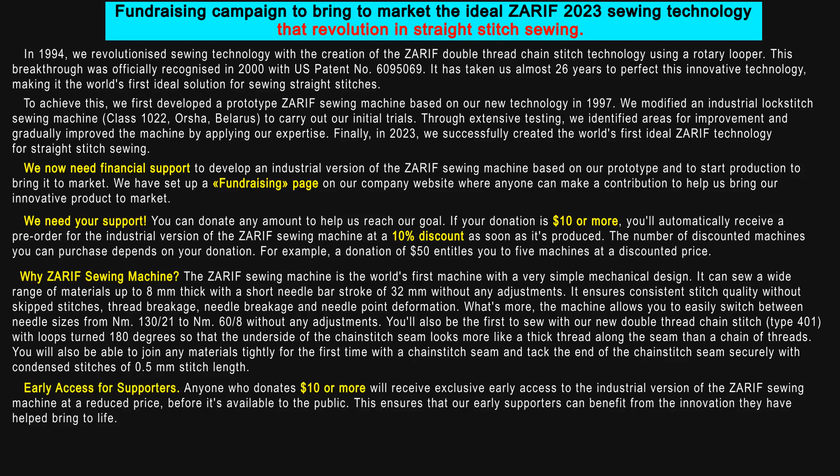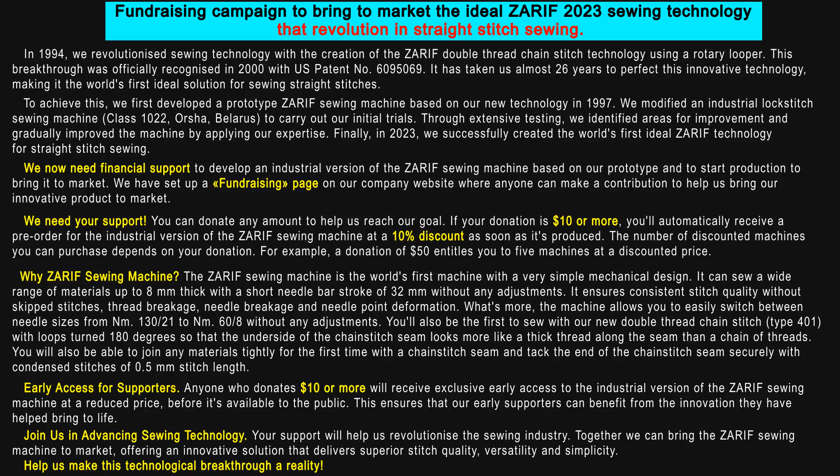Our Ideal Zarif 2023 year double thread chain stitch technology has revolutionized sewing machine design and straight stitch sewing.

Eternal disadvantages of existing technologies for forming lockstitch type 301 and double thread chain stitch type 401. The eternal disadvantages of the technologies of the lockstitch and of the double thread chain stitch when using a looper that carries the bottom thread. The eternal disadvantages of lockstitch technologies that are linked to the use of the hook.

Attention, no matter how much lockstitch technology is developed in the future, it will be technically impossible to obtain a lockstitch by feeding the bottom thread into the hook from a large bobbin instead of a small bobbin, to exclude frequent changing of the bobbin with the bottom thread located inside the hook, nor will it be technically possible to obtain quality sewing of various materials with different thickness, density and stiffness without adjusting the normal tension of the top and bottom threads.

Only our revolutionary Ideal Zarif double thread chain stitch technology of 2023, using a rotary looper with a small needle bar stroke of 32 mm, is capable of sewing quality straight thread seams on various materials up to 8 mm thick with different thickness, density and stiffness without adjusting the normal tension of the top and bottom threads, which we have spent approximately 26 years developing.

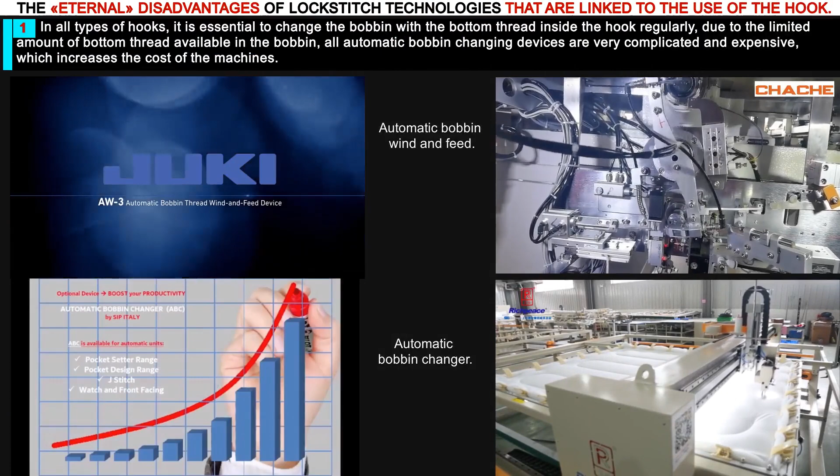Technologies of the lockstitch type 301 with different types of hooks. In all types of hooks, it is essential to change the bobbin with the bottom thread inside the hook regularly. Due to the limited amount of bottom thread available in the bobbin, all automatic bobbin changing devices are very complicated and expensive, which increases the cost of the machines.

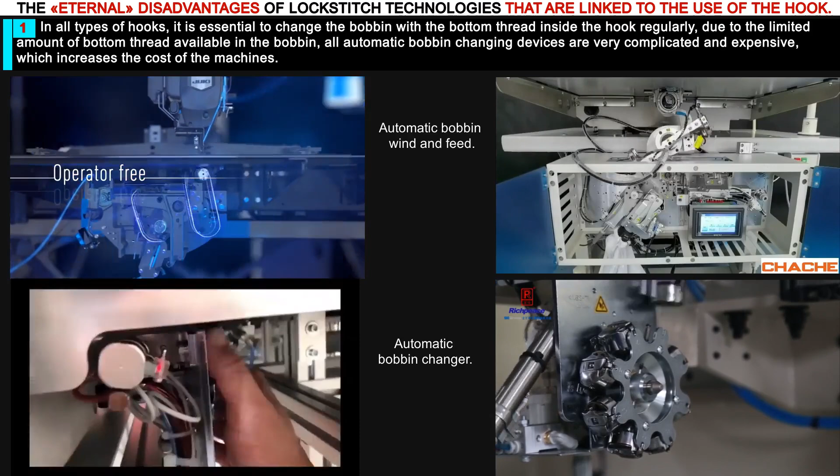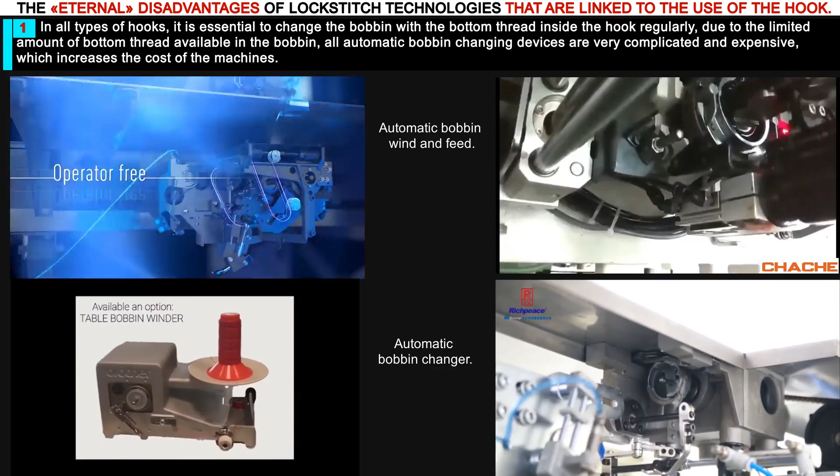When using all types of hooks, it is necessary to adjust the thread's tension to ensure the interweaving of threads in the middle of the sewn materials, when changing the thickness, density, stiffness and elasticity of the sewn materials, as well as when changing the thickness and type of sewing threads, and to increase the density of the join of materials, the smoothness of the seam on light materials, and the elasticity of the seam on elastic materials.

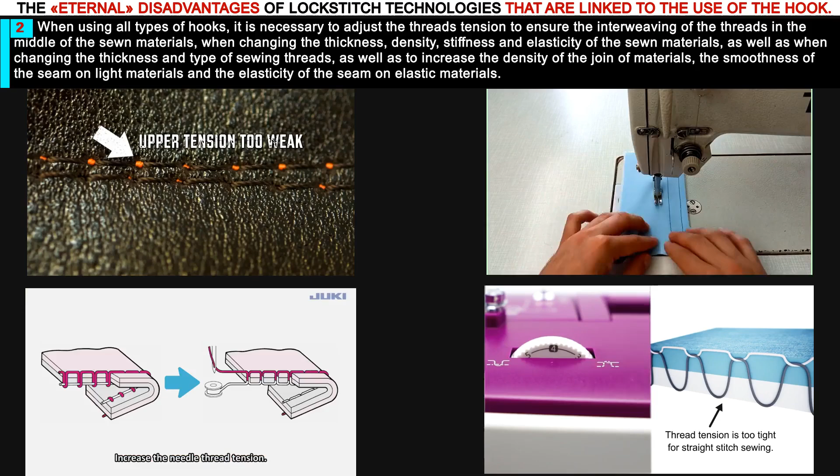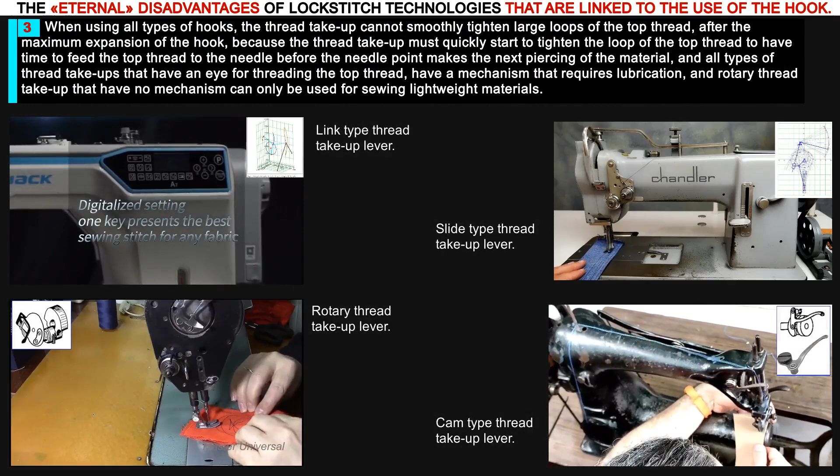When using all types of hooks, the thread take-up cannot smoothly tighten large loops of the top thread after the maximum expansion of the hook, because the thread take-up must quickly start to tighten the loop of the top thread to have time to feed it to the needle before the needle point makes the next piercing of the material. All types of thread take-ups with an eye for threading the top thread have a mechanism that requires lubrication, and rotary thread take-ups without such a mechanism can only be used for sewing lightweight materials.

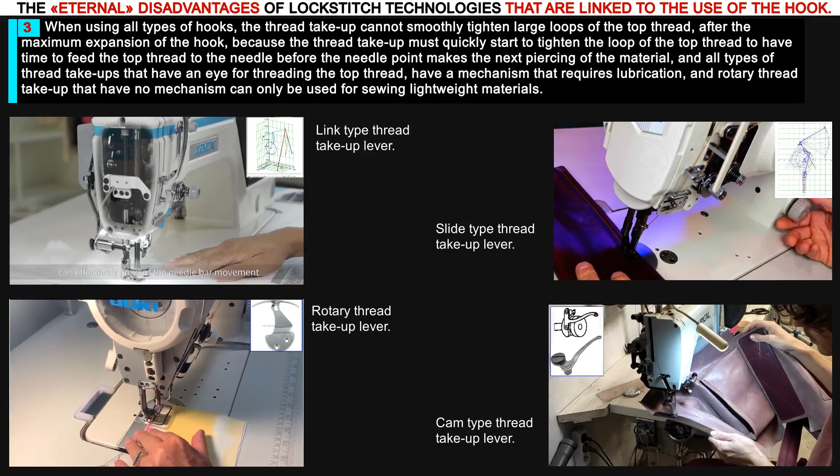All types of hooks have complex designs and are made up of many parts.

All types of hooks have a sliding area, as they have both fixed and moving parts, and their sliding areas must be lubricated, which can be done manually or automatically. The automatic lubrication system for the sliding area complicates the design of the hooks, making them more complex.

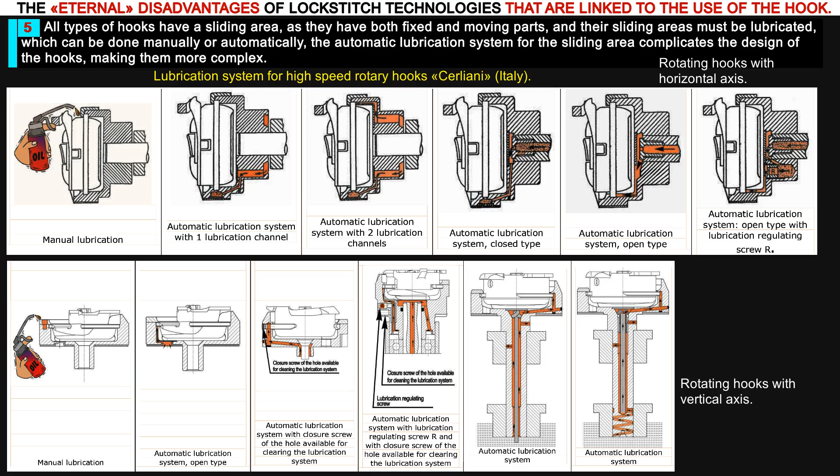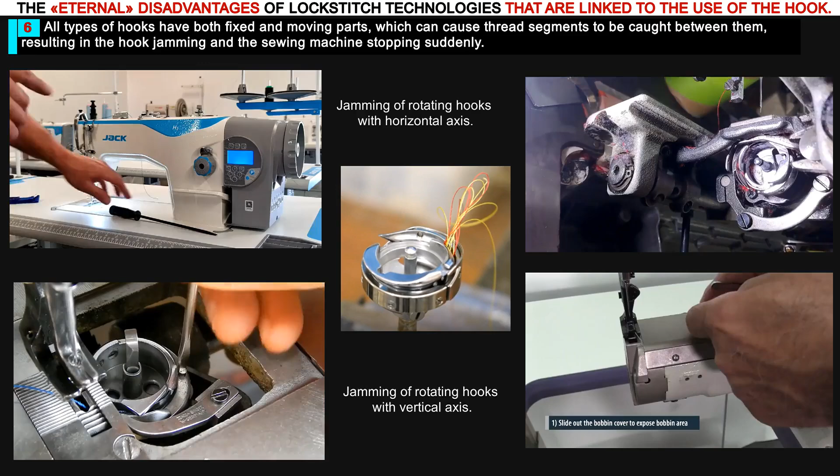All types of hooks have both fixed and moving parts, which can cause thread segments to be caught between them, resulting in the hook jamming and the sewing machine stopping suddenly.

All types of hooks have a limited life due to friction in the sliding area between the fixed and moving parts of the hook.

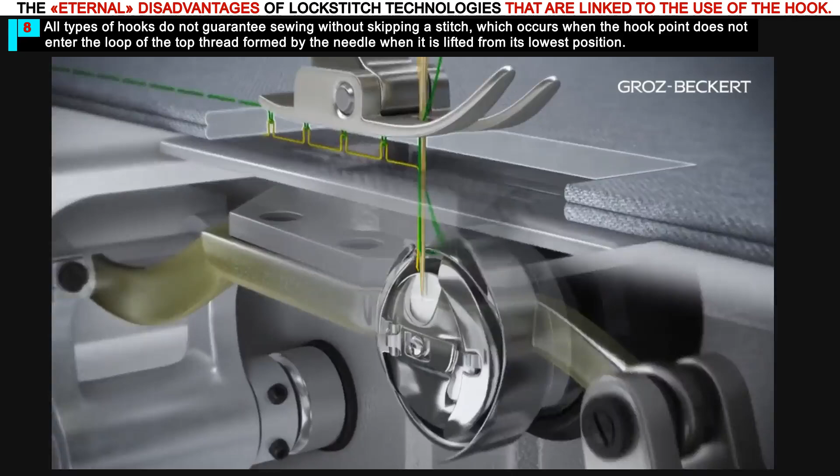All types of hooks do not guarantee sewing without skipping a stitch, which occurs when the hook point does not enter the loop of the top thread formed by the needle when it is lifted from its lowest position.

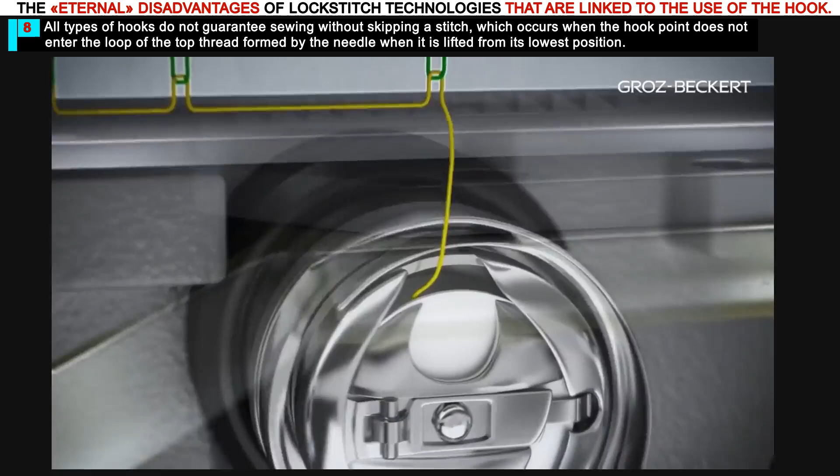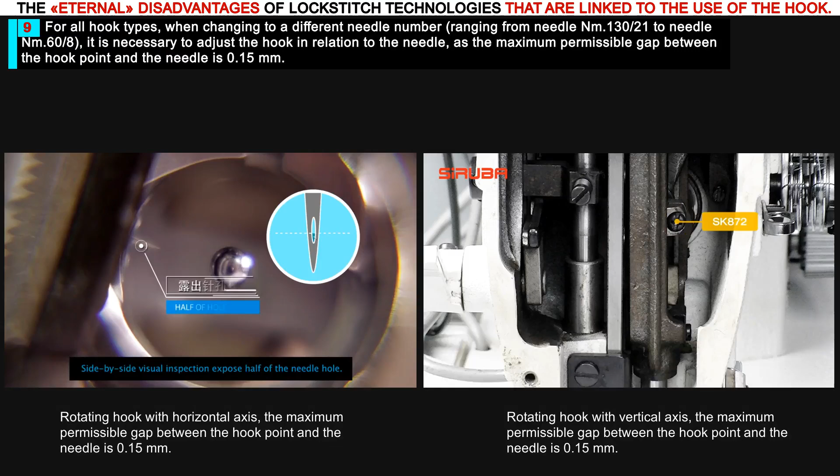For all hook types, when changing to a different needle number, ranging from needle number 130 to needle number 60, it is necessary to adjust the hook in relation to the needle, as the maximum permissible gap between the hook point and the needle is 0.15 mm.

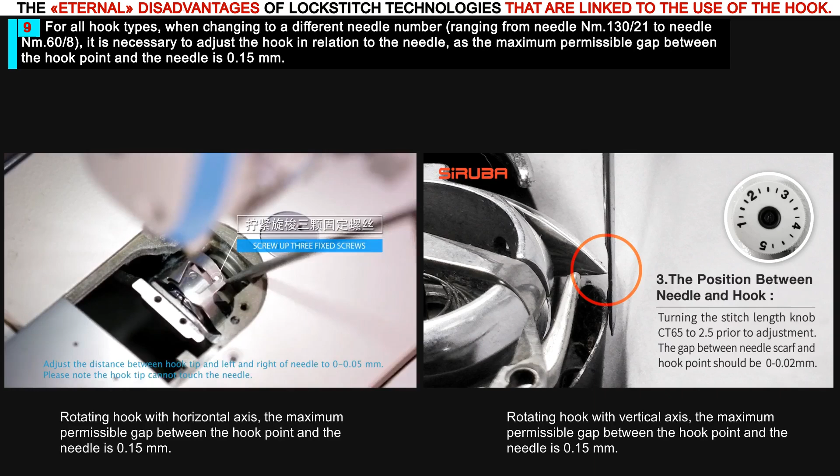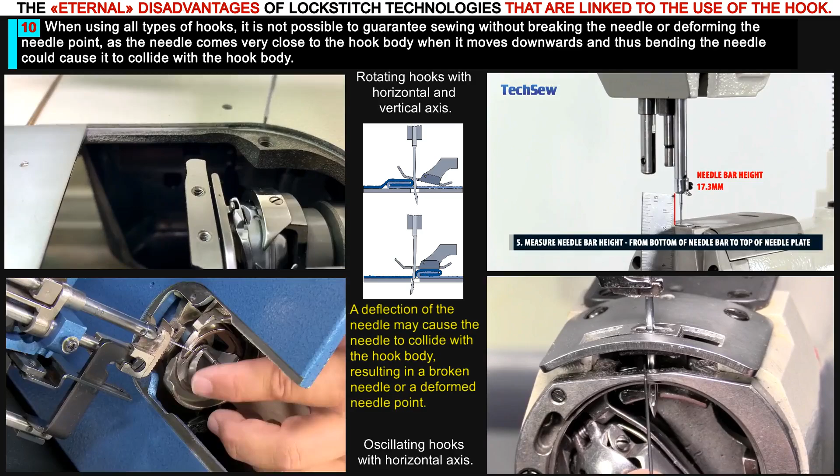When using all types of hooks, it is not possible to guarantee sewing without breaking the needle or deforming the needle point, as the needle comes very close to the hook body when it moves downwards, and thus bending the needle could cause it to collide with the hook body.

All types of hooks consume a considerable amount of the top thread. As a result, each part of the top thread before entering the stitch repeatedly passes through the material to be sewn, the needle eye and the thread guides. This leads to wear of the top thread and a reduction in its strength. As the size of the hooks and the sewing speed increase, the loss of top thread strength during the sewing process also increases.

For sewing thick and heavy fabrics up to 8 mm in thickness, using all types of hooks, the sewing machine needs a large needle bar stroke, greater than 32 mm.

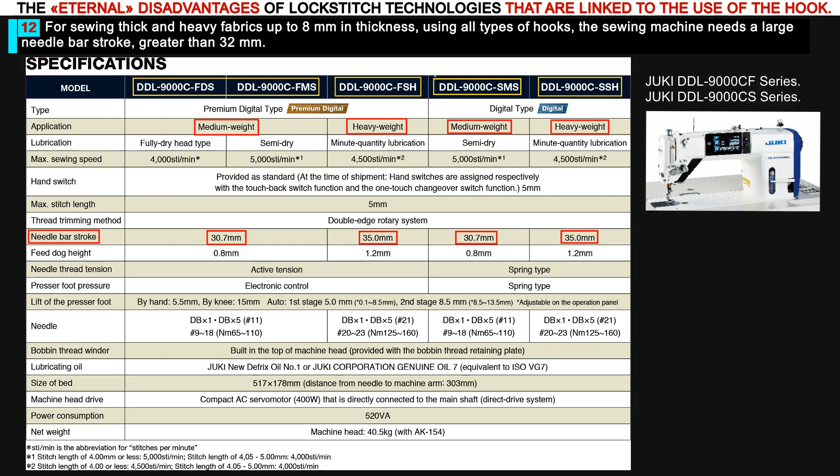The eternal disadvantages of double thread chain stitch technologies that are linked to the use of the looper carrying the bottom thread.

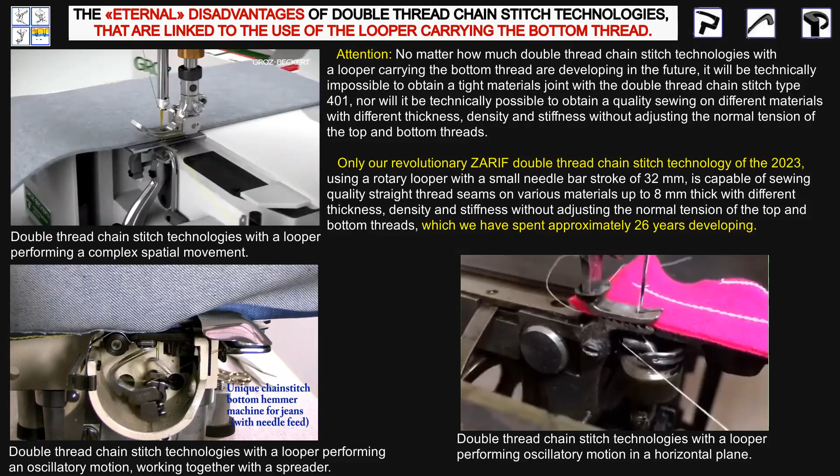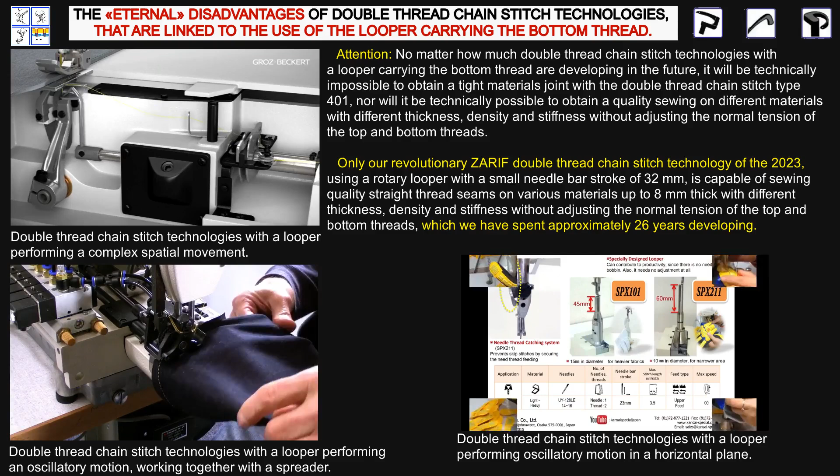Attention: no matter how much double thread chain stitch technologies with a looper carrying the bottom thread develop in the future, it will be technically impossible to obtain a tight materials joint with the double thread chain stitch type 401, nor will it be technically possible to obtain quality sewing on different materials with different thickness, density and stiffness without adjusting the normal tension of the top and bottom threads.

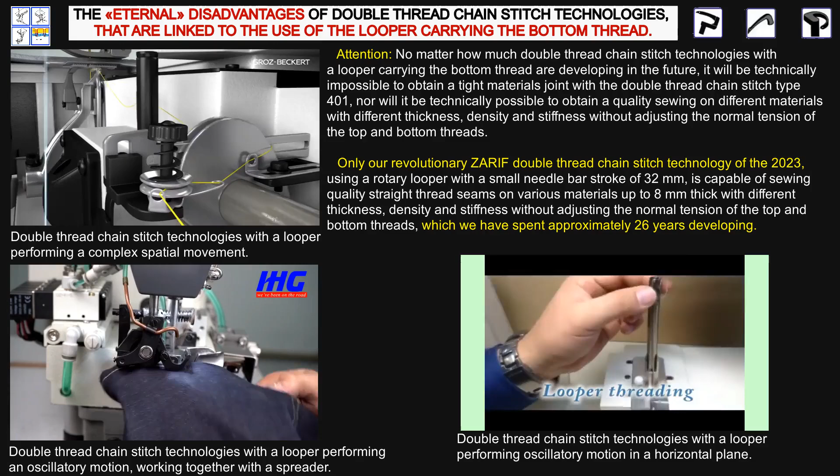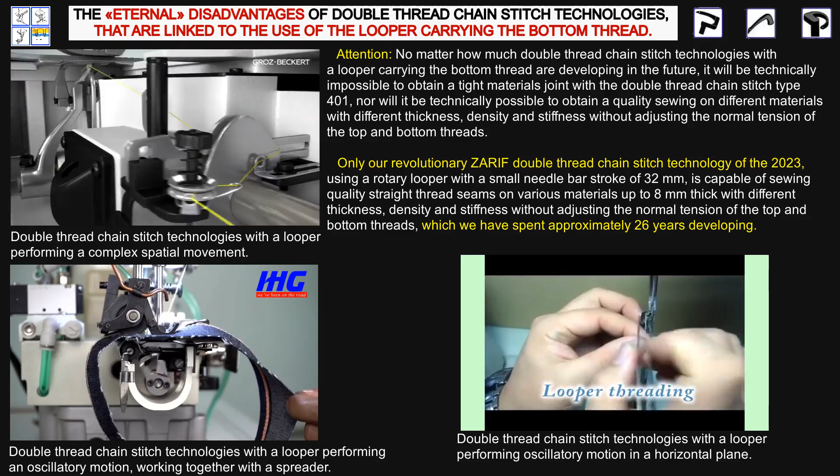Only our revolutionary ideal Zarif double thread chain stitch technology of 2023, using a rotary looper with a small needle bar stroke of 32 mm, is capable of sewing quality straight thread seams on various materials up to 8 mm thick with different thickness, density, and stiffness, without adjusting the normal tension of the top and bottom threads, which we have spent approximately 26 years developing.

Double thread chain stitch technologies using 3 types of loopers carrying the bottom thread.

All 3 technologies using 3 types of loopers carrying the bottom thread are not able to join the materials tightly with a chain seam and reduce the thickness of the underside of the chain seam. This is due to the fact that there is 2-stage tightening of the top thread loop located in the previous stitch.

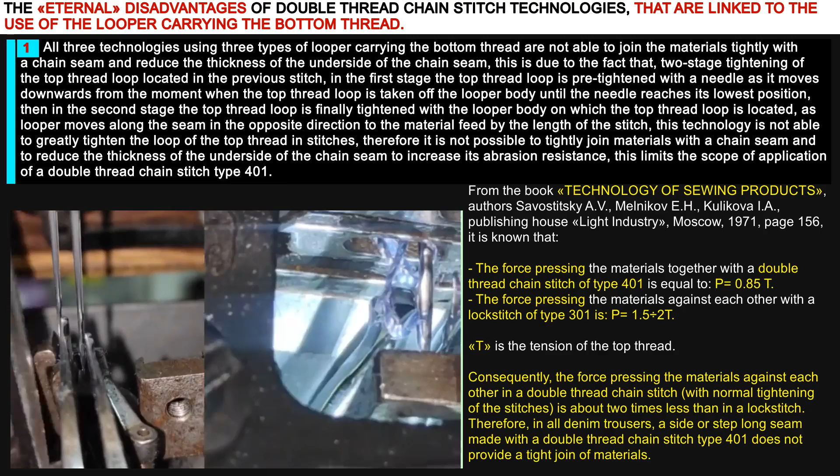In the first stage, the top thread loop is pre-tightened with a needle as it moves downwards from the moment when the top thread loop is taken off the looper body until the needle reaches its lowest position. Then in the second stage, the top thread loop is finally tightened with the looper body on which the top thread loop is located,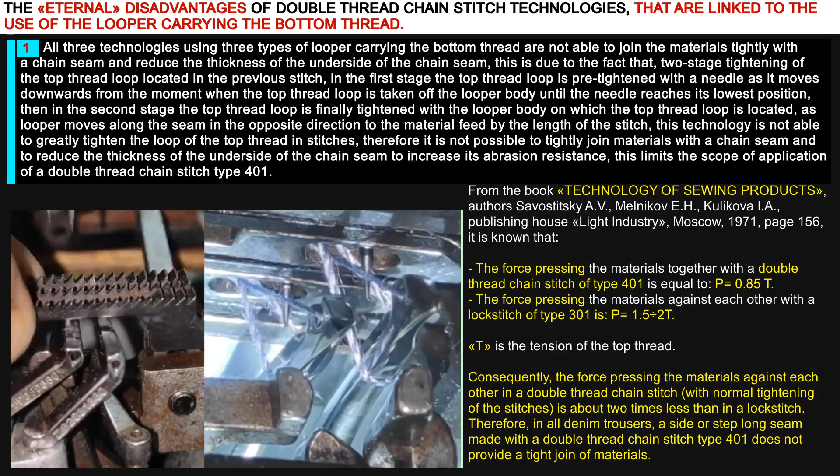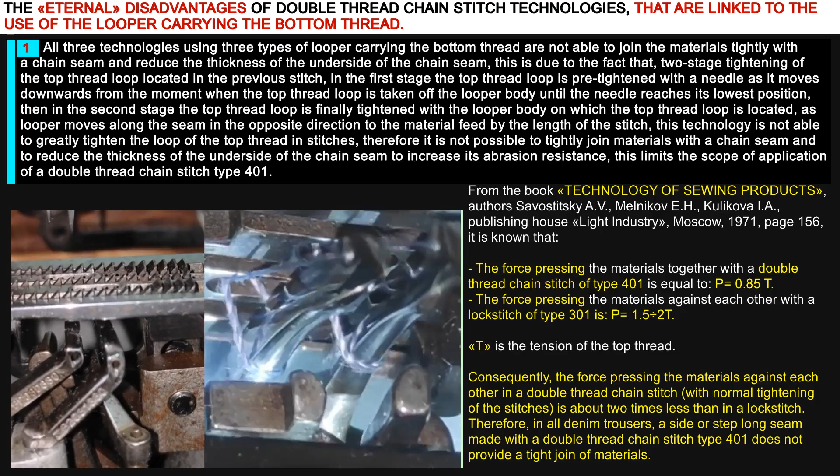as the looper moves along the seam in the opposite direction to the material feed by the length of the stitch. This technology is not able to greatly tighten the loop of the top thread in stitches, therefore it is not possible to tightly join materials with a chain seam and to reduce the thickness of the underside of the chain seam to increase its abrasion resistance. This limits the scope of application of a double thread chain stitch type 401.

All 3 technologies using 3 types of loopers carrying the bottom thread are forced to use a needle with 2 long grooves. This is due to the pre-tightening of the loop of the top thread located in the previous stitch with a needle during its downward movement.

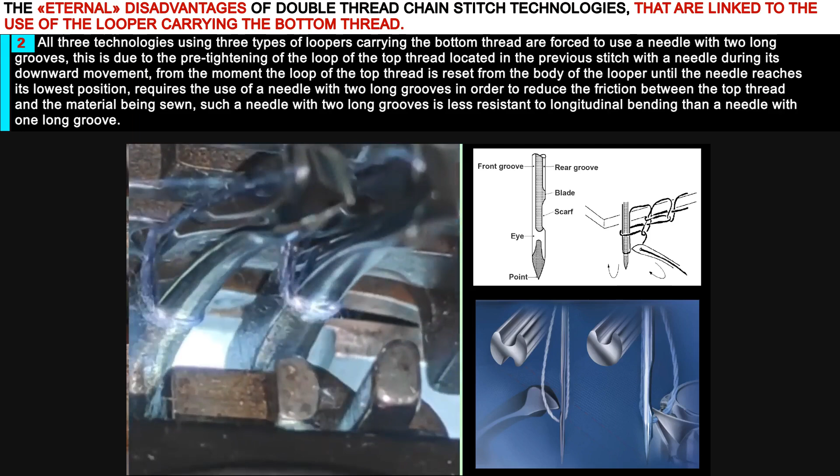From the moment the loop of the top thread is reset from the body of the looper until the needle reaches its lowest position, this requires the use of a needle with 2 long grooves in order to reduce the friction between the top thread and the material being sewn. Such a needle with 2 long grooves is less resistant to longitudinal bending than a needle with 1 long groove.

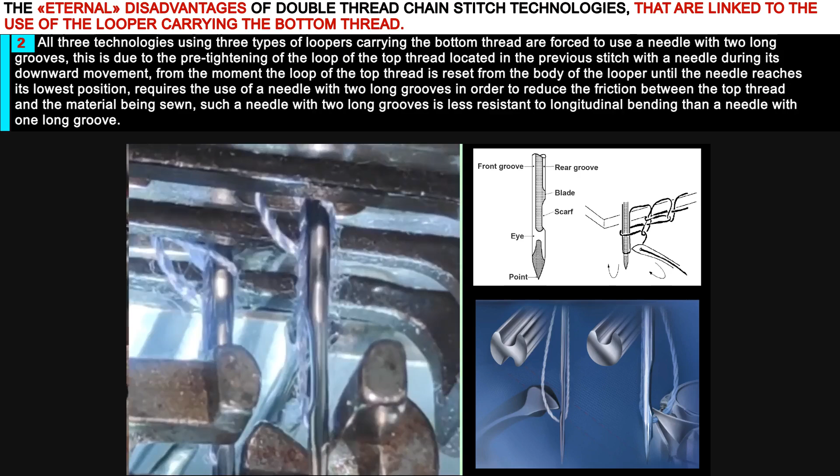All 3 technologies using 3 types of loopers carrying the bottom thread are not able to join combinations of different materials qualitatively. This is due to the fact that the thread take-up feeds the top thread into the needle until the top thread loop is released from the looper body.

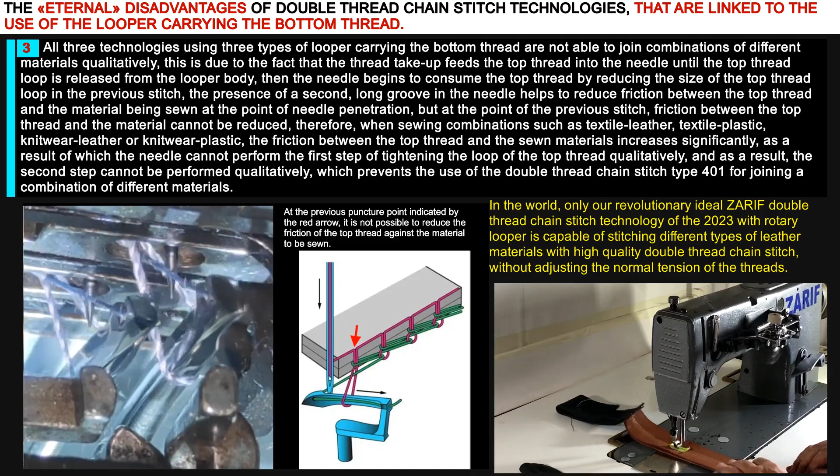Then the needle begins to consume the top thread by reducing the size of the top thread loop in the previous stitch. The presence of a second long groove in the needle helps to reduce friction between the top thread and the material being sewn at the point of needle penetration, but at the point of the previous stitch, friction between the top thread and the material cannot be reduced.

Therefore, when sewing combinations such as textile-leather, textile-plastic, knitwear-leather, or knitwear-plastic, the friction between the top thread and the sewn materials increases significantly. As a result, the needle cannot perform the first step of tightening the loop of the top thread qualitatively, and as a result the second step cannot be performed qualitatively, which prevents the use of the double thread chain stitch type 401 for joining a combination of different materials.

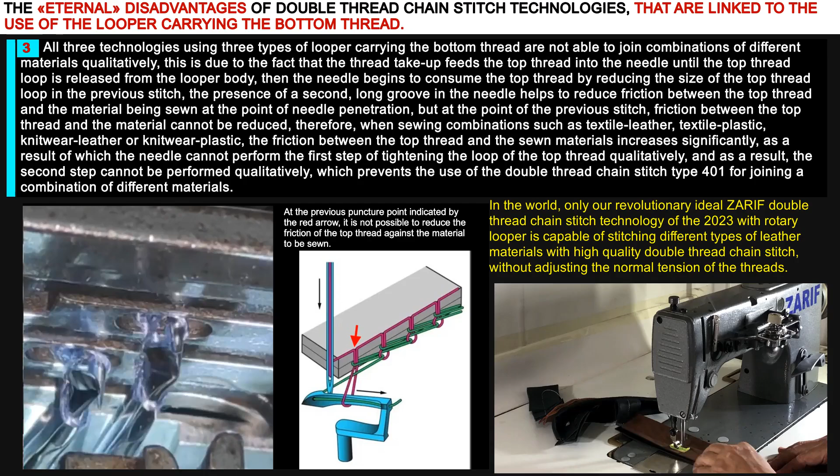All technologies that use loopers carrying the bottom thread are not able to sew double thread chain stitch of high quality on different materials of different thickness, stiffness, and density without adjusting the normal tension of the threads.

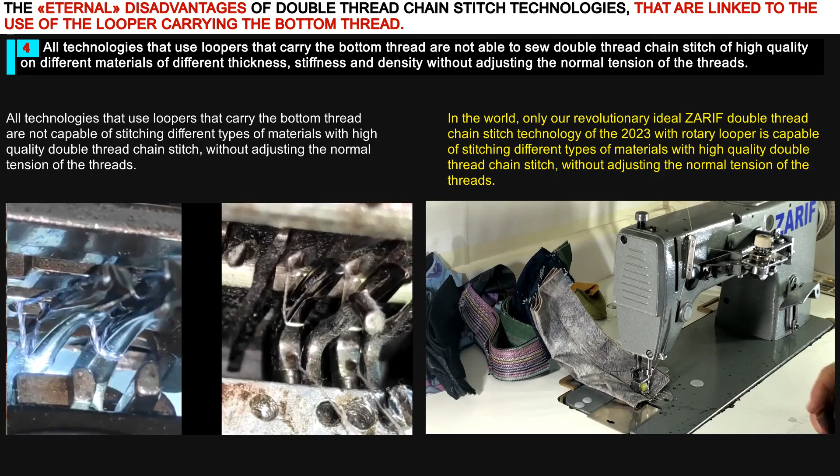All technologies that use one of the 3 types of loopers carrying the bottom thread are unable to guarantee sewing without causing the needle to break and deform the needle tip. This is because the needle passes very closely to the body of the looper as it moves down, and so the deviation of the needle may lead to it colliding with the body of the looper.

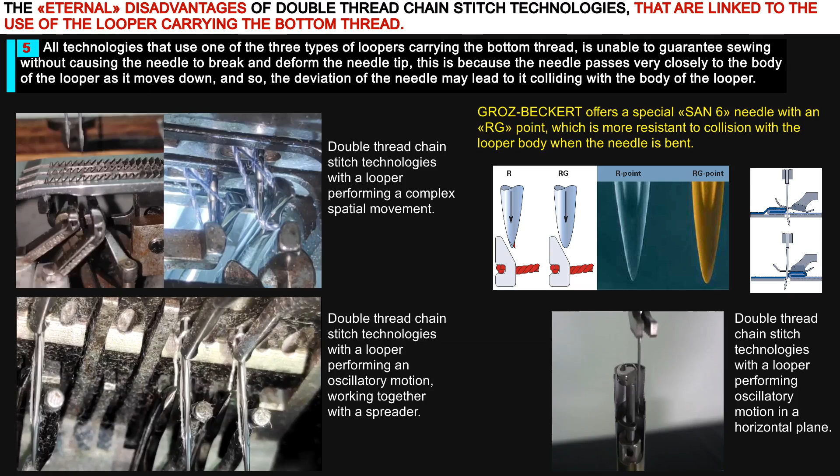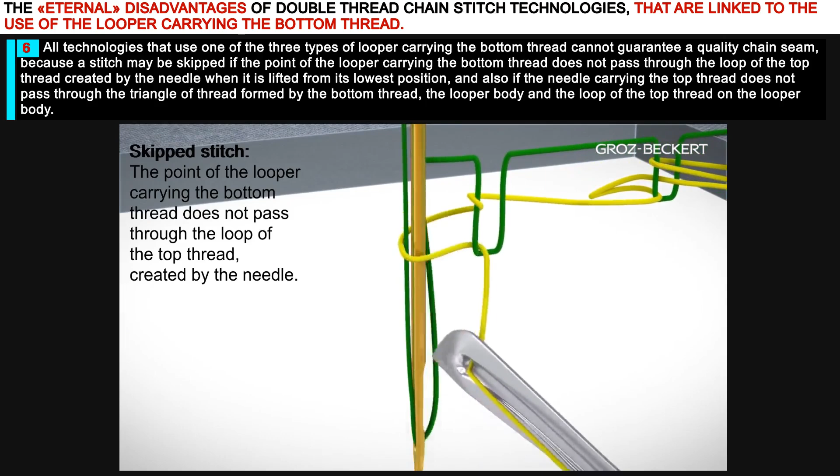All technologies that use one of the 3 types of loopers carrying the bottom thread cannot guarantee a quality chain seam, because a stitch may be skipped if the point of the looper carrying the bottom thread does not pass through the loop of the top thread created by the needle when it is lifted from its lowest position, and also if the needle carrying the top thread does not pass through the triangle of thread formed by the bottom thread, the looper body and the loop of the top thread on the looper body.

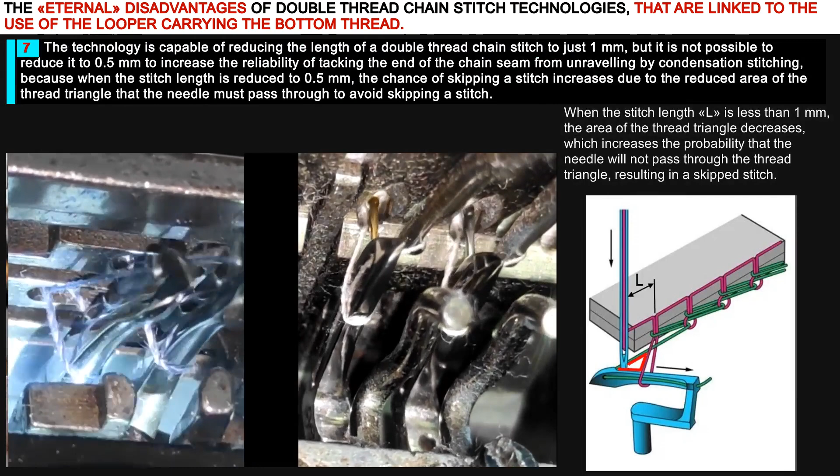The technology is capable of reducing the length of a double thread chain stitch to just 1 mm, but it is not possible to reduce it to 0.5 mm to increase the reliability of tacking the end of the chain seam from unraveling by condensation stitching, because when the stitch length is reduced to 0.5 mm, the chance of skipping a stitch increases due to the reduced area of the thread triangle that the needle must pass through to avoid skipping a stitch.

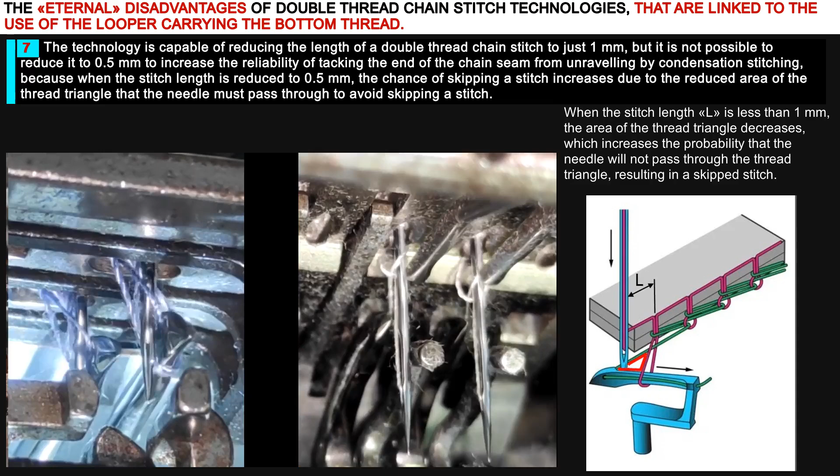All technologies that use one of the three types of loopers carrying the bottom thread are forced to use movable and immovable needle guards to increase the reliability of the stitch formation.

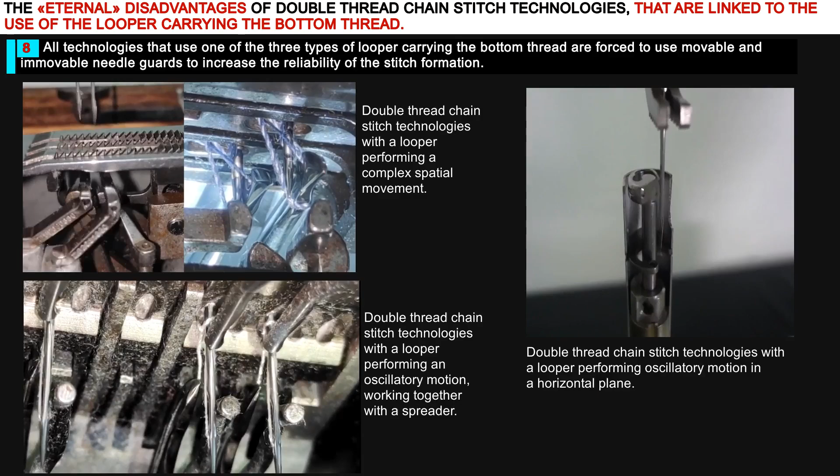The technology of forming a chain stitch by means of a looper, which carries the bottom thread and makes spatial movements along a complex ellipsoidal trajectory, uses a very complex mechanism.

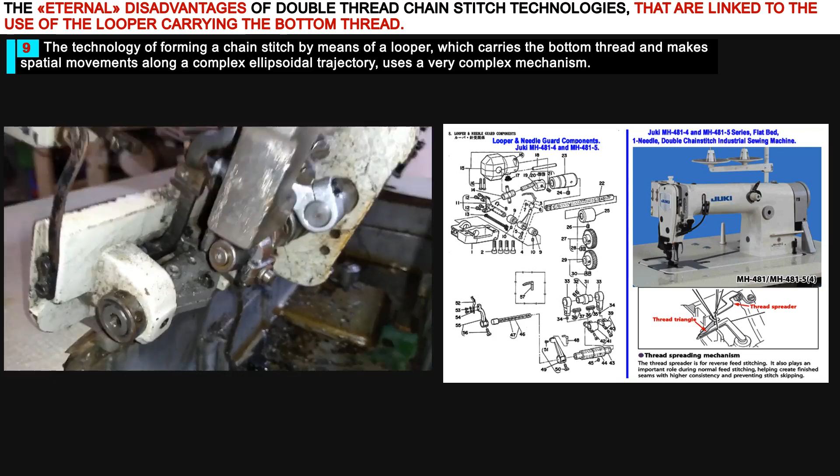For all three types of loopers carrying the bottom thread, when changing to a different needle number, ranging from needle number 130 to needle number 60, it is necessary to adjust the looper in relation to the needle, as the maximum permissible gap between the looper point and the needle is 0.15 millimeters.

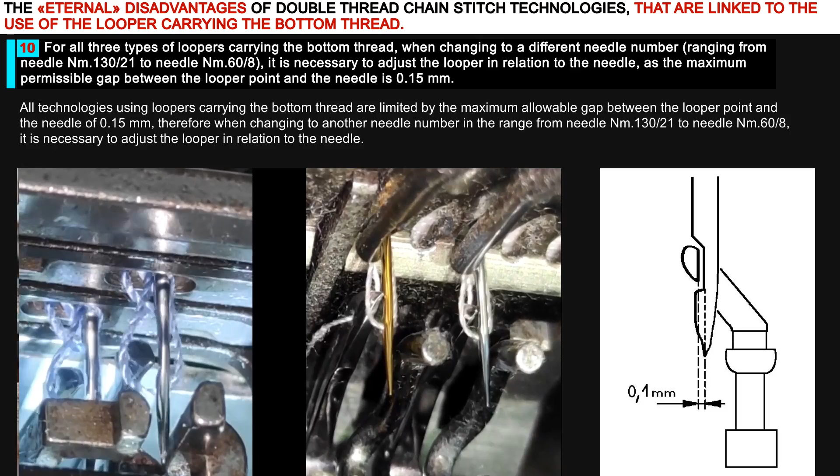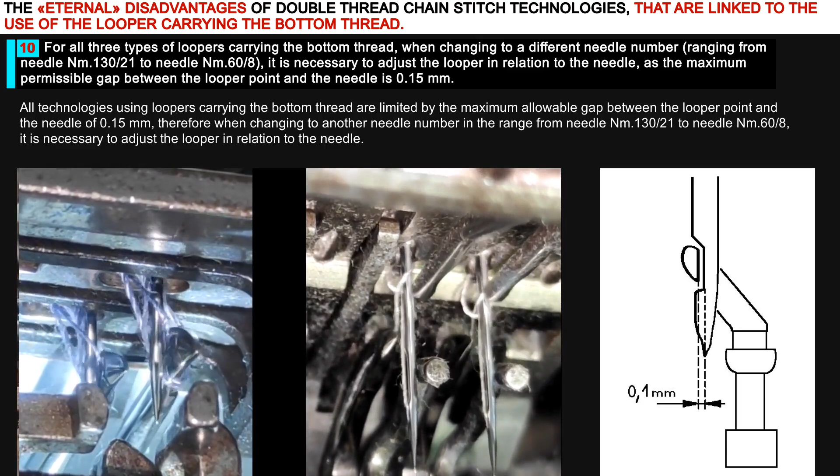For sewing thick and heavy fabrics up to 8 mm in thickness, using all three types of loopers carrying the bottom thread, the sewing machine needs a large needle bar stroke, greater than 32 mm.

History of Zarif double thread chain stitch technology with rotary looper. In 1994 we came up with the idea of creating a double thread chain stitch type 401 using a rotary looper. We applied for a patent for this new Zarif double thread chain stitch technology, and in 2000 US patent number 6095069 was granted.

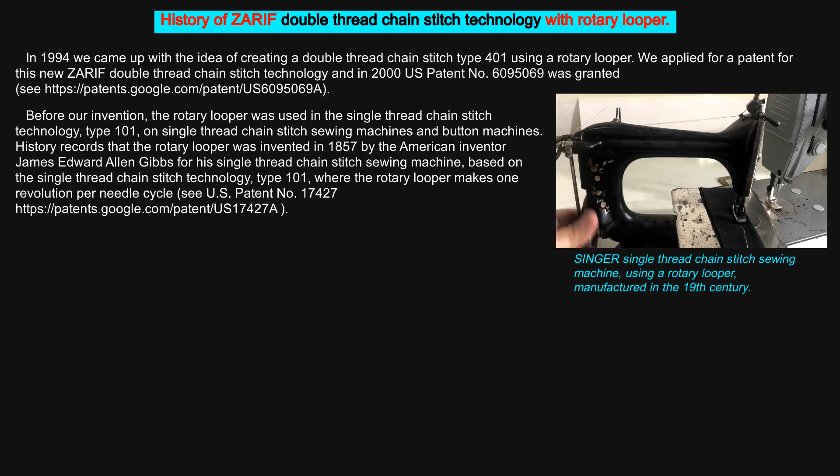Before our invention, the rotary looper was used in the single thread chain stitch technology, type 101, on single thread chain stitch sewing machines and button machines. History records that the rotary looper was invented in 1857 by the American inventor James Edward Allen Gibbs for his single thread chain stitch sewing machine, based on the single thread chain stitch technology, type 101, where the rotary looper makes 1 revolution per needle cycle. See US patent number 17427.

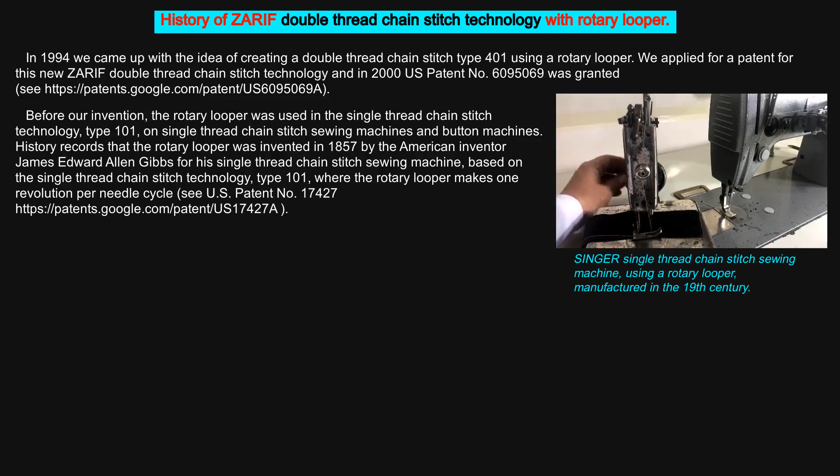A rotary looper is a unique and the only tool in sewing technology that can rotate loops of thread around its body by turning them 180 degrees with its tail. As is known, the rotary looper is made in one piece and has 3 zones: the head zone with a front tip to catch the thread and a rear tip to release the thread loop from the body of the looper, the tail zone for rotating the thread loop through 180 degrees, and the shaft zone for attaching the looper to the machine.

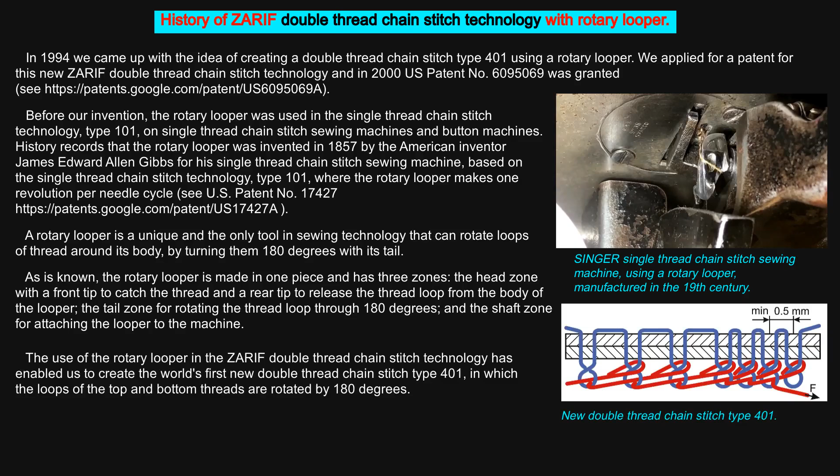The use of the rotary looper in the Zarif double thread chain stitch technology has enabled us to create the world's first new double thread chain stitch type 401, in which the loops of the top and bottom threads are rotated by 180 degrees. The Zarif double thread chain stitch technology forms a double thread chain stitch type 401, where the rotary looper makes 2 revolutions per needle cycle. Zarif double thread chain stitch technology with rotary looper, invented by us in 1994, see US patent number 6095069.

In the Zarif double thread chain stitch technology, the top thread is fed to the looper by a needle with a vertical reciprocating motion, as is usually done. To feed the bottom thread to the looper, a bottom thread pusher is used, which makes oscillating movements in the horizontal plane. Since the rotary looper can loop thread around its body in the form of a loop, once the

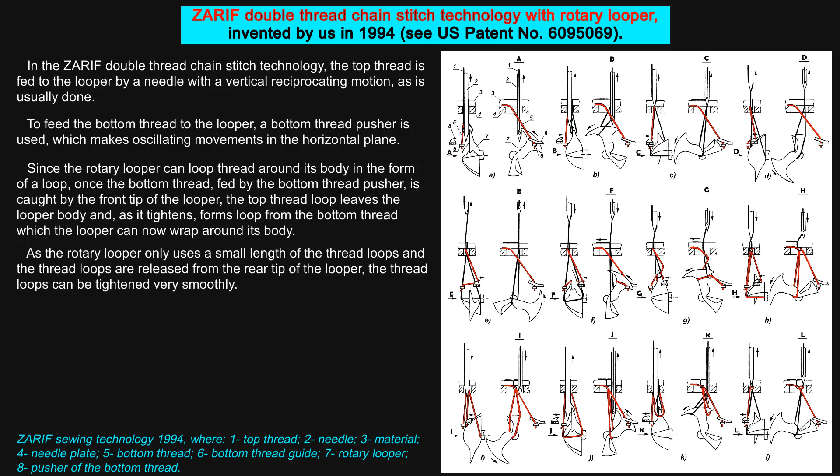bottom thread, fed by the bottom thread pusher, is caught by the front tip of the looper, the top thread loop leaves the looper body and, as it tightens, forms a loop from the bottom thread which the looper can now wrap around its body. As the rotary looper only uses a small length of the thread loops and the thread loops are released from the rear tip of the looper, the thread loops can be tightened very smoothly.

Therefore, the Zarif double thread chain stitch technology uses 2 rotary twin disc cam thread take-ups to feed and tighten both the top and bottom threads, with each thread being controlled separately.

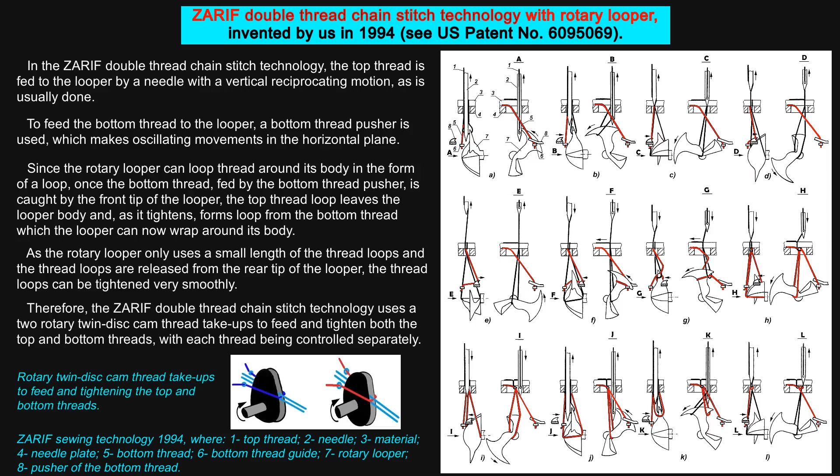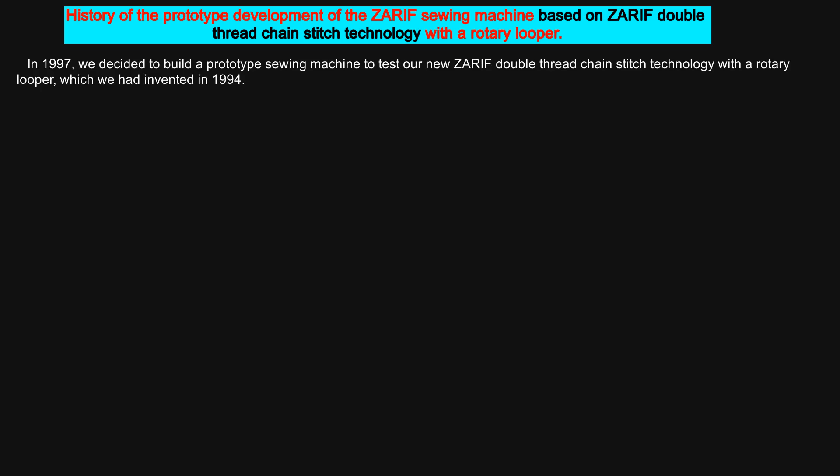History of the prototype development of the Zarif sewing machine based on Zarif double thread chain stitch technology with a rotary looper. In 1997, we decided to build a prototype sewing machine to test our new Zarif double thread chain stitch technology with a rotary looper, which we had invented in 1994. We chose a Class 1022 lockstitch industrial sewing machine from the Belarusian company Orsha because it was widely used in Uzbekistan at the time and was relatively affordable.

The machine had a needle bar stroke of 32 mm and was designed to sew fabrics of medium thickness. After a thorough review of the machine's design, we successfully integrated our new Zarif sewing technology into the machine, retaining only the mechanisms of the material feed, presser foot, and needle.

Thus, in 1997, we produced the world's first prototype of the Zarif double thread chain stitch sewing machine with rotary looper. Trials on a prototype Zarif sewing machine allowed us to identify some of the shortcomings of our new Zarif double thread chain stitch technology developed in 1994.

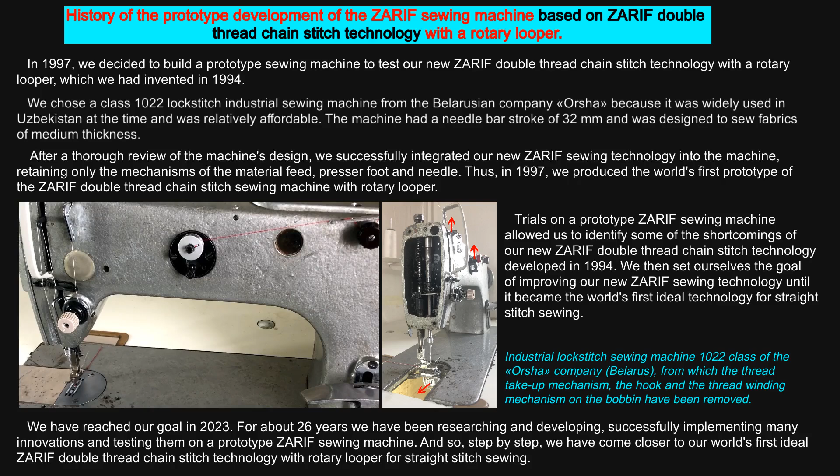We then set ourselves the goal of improving our new Zarif sewing technology until it became the world's first ideal technology for straight stitch sewing. We have reached our goal in 2023. For about 26 years we have been researching and developing, successfully implementing many innovations and testing them on a prototype Zarif sewing machine. And so, step by step, we have come closer to our world's first ideal Zarif double thread chain stitch technology with rotary looper for straight stitch sewing.

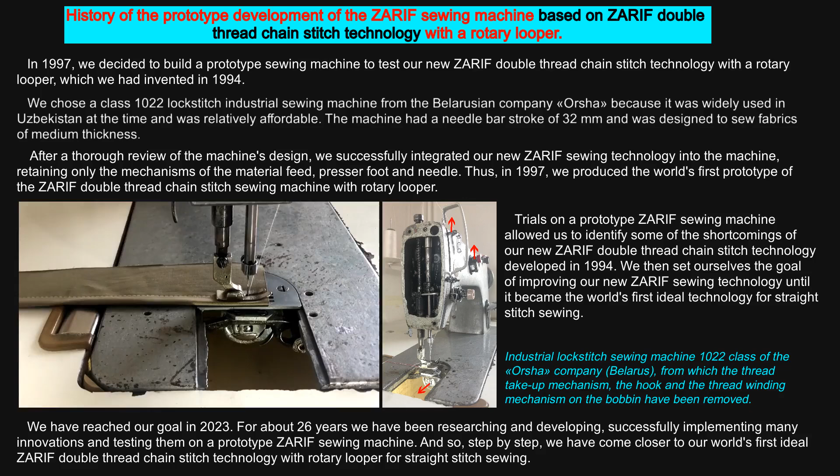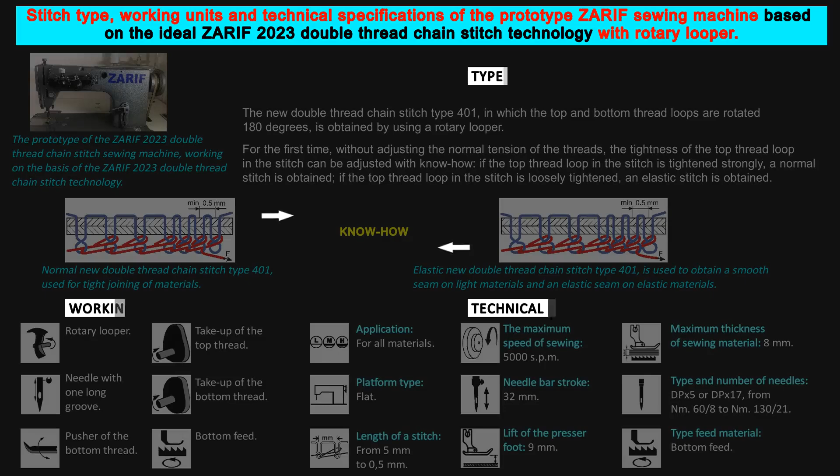Stitch type, working units, and technical specifications of the prototype Zarif sewing machine based on the ideal Zarif 2023 year double thread chain stitch technology with rotary looper.

The world's first prototype of the Zarif 2023 year double thread chain stitch sewing machine has an extremely simple mechanical design and forms stitches with high reliability and durability.

The use of 3 rotary working units in the machine, such as the rotary looper and 2 rotary thread take-ups, together with a simple crank slider mechanism for the needle and the absence of needle guards, has made it possible to create the world's first prototype of the Zarif sewing machine with a very simple mechanical design.

In addition, the machine is the first in the world to allow easy switching between different needle sizes, from needle number 130 to needle number 60, without having to adjust the position of the looper relative to the needle, thanks to the world's first increase of the maximum allowable gap between the needle and the looper tip to 0.5 mm.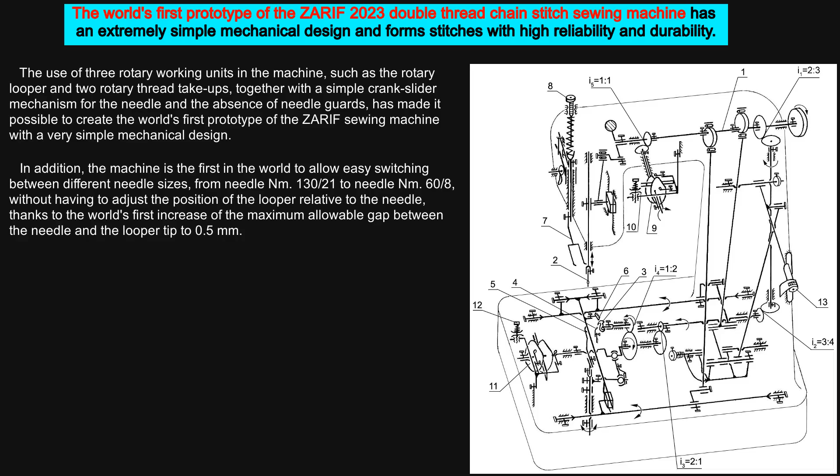In addition, the machine is very easy to maintain as all working units are mounted on the ends of the shafts and can be removed without dismantling other parts of the machine.

Kinematic diagram of the prototype Zarif 2023 year double thread chain stitch sewing machine.

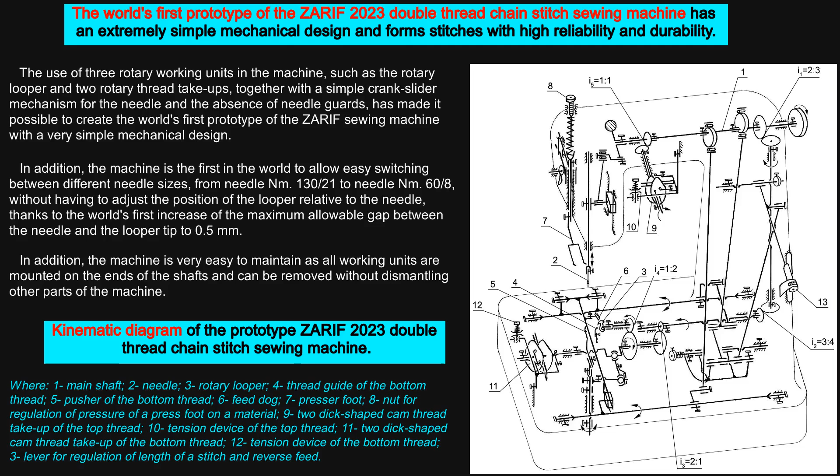Our automatic thread trimming technology for the Zarif double thread chain stitch technology with rotary looper. It is well known that most modern industrial sewing machines are equipped with automatic thread trimming, and all automated sewing systems require automatic thread trimming.

With this in mind, we have long been researching and developing automatic thread trimming technology for our Zarif double thread chain stitch technology with rotary looper. Thanks to these efforts, we successfully invented the automatic thread trimming technology in 2020, and further improved it in 2021 and 2023.

The advanced version of our automatic thread trimming technology, which we invented in 2023, has not yet been physically manufactured to ensure its practical functionality. However, the drawings of our automatic thread trimming technology prove that it works in theory. At present we cannot disclose the details as it is not yet patented.

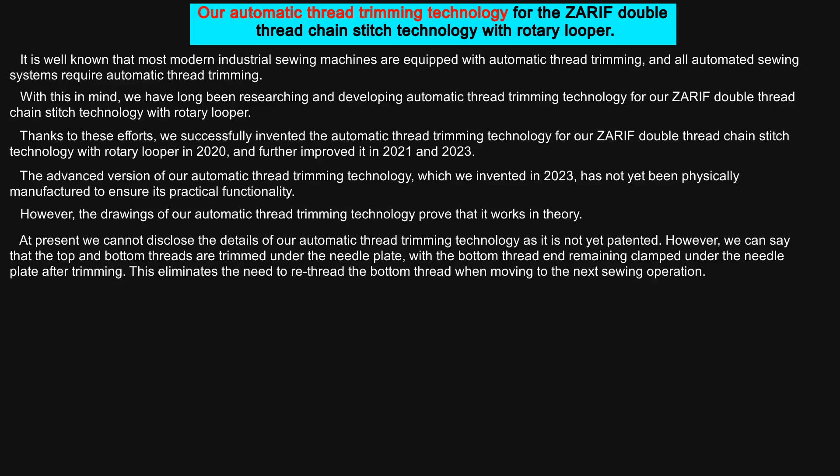However, we can say that the top and bottom threads are trimmed under the needle plate, with the bottom thread end remaining clamped under the needle plate after trimming. This eliminates the need to rethread the bottom thread when moving to the next sewing operation.

If the sewing process is finished with condensed stitches of 0.5 mm stitch length and manual thread trimming, the resulting chain stitch seam will be difficult to unravel from the end of the seam.

If the sewing process is finished with condensation stitches at a stitch length of 0.5 mm and with automatic thread trimming, the resulting chain stitch seam cannot be unraveled from the end of the seam, as the end of the top thread passes through the last loop of the bottom thread.

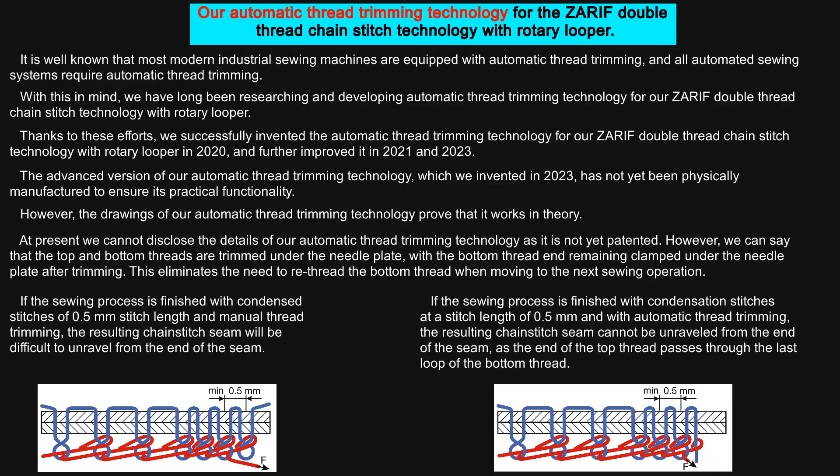Our ideal Zarif 2023 year double thread chain stitch technology with rotary looper opens a new era in the development of automated straight stitch sewing.

It is well known that the future of mass production in various sewing industries is closely linked to automation, and the automation of sewing processes plays an important role in this transformation. Currently, some sewing operations are already being automated using robotic manipulator-controlled sewing systems. In the future, these robotic manipulators may be replaced by more advanced humanoid robots.

When it comes to automated sewing, it is essential that the process is performed to a high standard, ensuring that there are no skipped stitches, thread breakage, needle breakage, and deformation of the needle point. Efficient sewing of different materials without the need for adjustments is also critical to the automation of the sewing process.

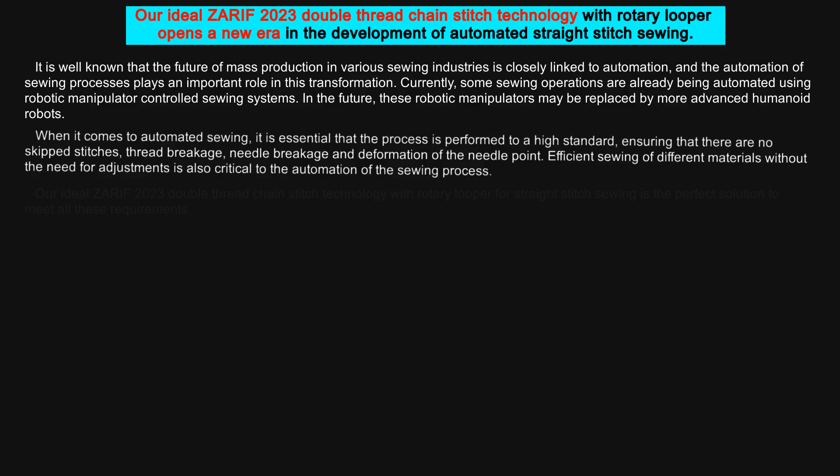Our ideal Zarif 2023 year double thread chain stitch technology with rotary looper for straight stitch sewing is the perfect solution to meet all these requirements. Our prototype Zarif sewing machine has proven this in practice, but only when the material is fed in one direction.

This allows us to create different automatic sewing systems based on this technology, where the material is fed in a single direction. However, there are many sewing operations where the stitch must follow a complex path. In such cases, stitch formation must be independent of the material feed direction. With this in mind, we have been working for a long time to develop a device that would allow our Zarif double thread chain stitch technology with rotary looper to produce stitches regardless of the direction of material feed.

As a result of our efforts, we were able to invent this device in 2020, improve it in 2021, and complete the final refinements in 2023. Although we have not yet built and tested the device, our drawings show that it theoretically works.

Patent protection for our inventions from 2023. We intend to secure patents in several countries around the world for all our inventions developed in 2023, including the ideal Zarif double thread chain stitch technology with rotary looper, automatic thread trimming technology, and the device that allows stitch formation with material feed in any direction.

Advantages and disadvantages of lockstitch type 301 and double thread chain stitch type 401.

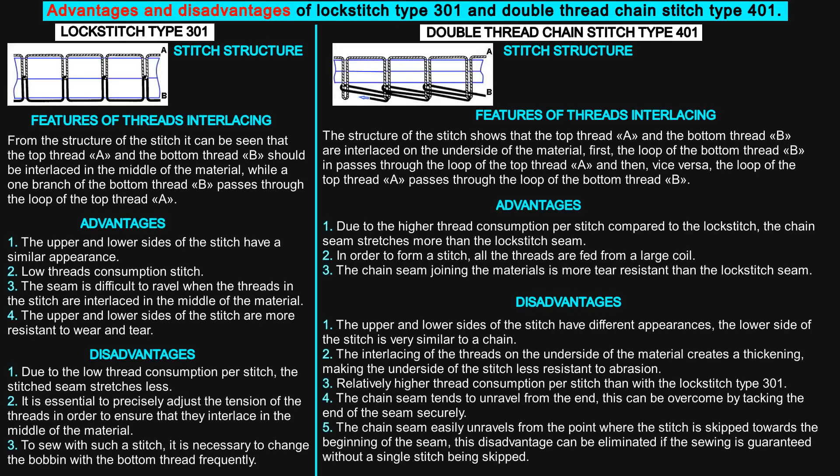Application of the revolutionary ideal Zarif 2023 double thread chain stitch technology with a rotary looper that forms stitches in only one direction. Our prototype Zarif sewing machine, based on this technology, has proven its ability to perform straight stitching with material feed in only one direction and a stitch length ranging from 0.5 mm to 5 mm. In addition, we have developed a technical solution that allows the stitch length to be increased to 10 mm.

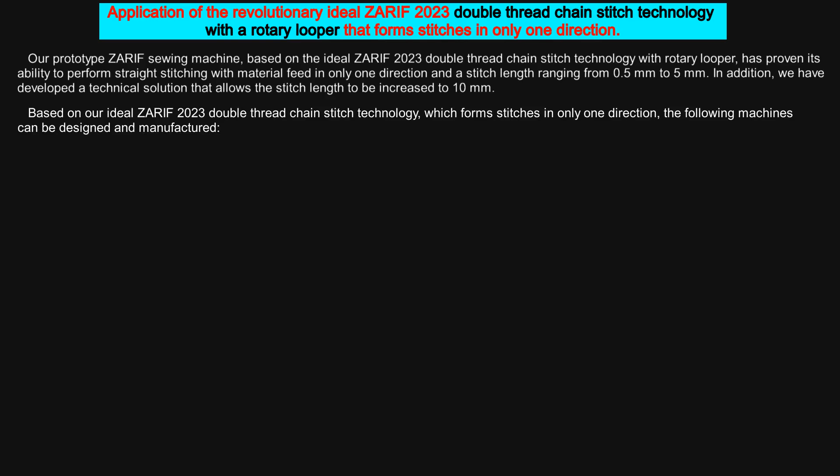Based on our ideal Zarif 2023 double thread chain stitch technology, which forms stitches in only one direction, the following machines can be designed and manufactured: various industrial sewing machines with different types of platforms and material feed mechanisms, various automated sewing systems with material feed in one direction only, and a range of programmable automatic pattern sewing machines with a 360 degree rotating head that can feed material in any direction to create complex stitch patterns.

Application of the revolutionary ideal Zarif 2023 double thread chain stitch technology with a rotary looper, forming stitches in any direction. If the device we invented in 2023, which enables this technology to form stitches with material feed in any direction, works successfully in practice, the following automated machines can be designed and manufactured on the basis of it, enabling the production of complex stitch patterns.

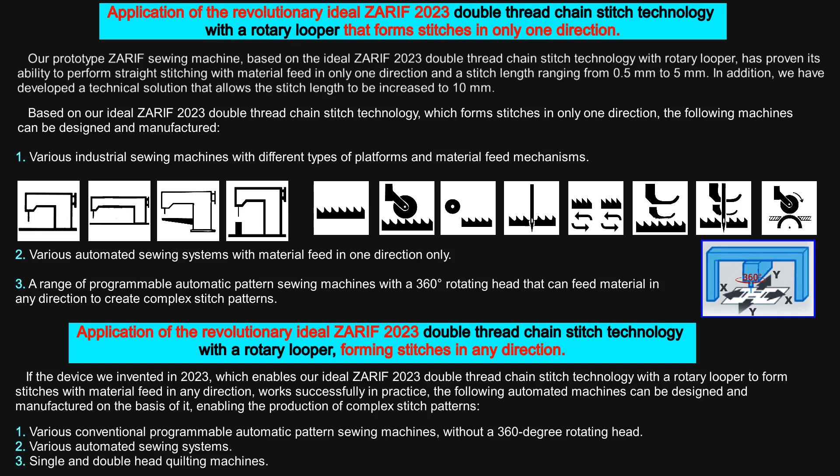Various conventional programmable automatic pattern sewing machines without a 360 degree rotating head. Various automated sewing systems. Single and double head quilting machines.

Can our revolutionary ideal Zarif 2023 double thread chain stitch technology with a rotary looper become obsolete in the future? We are confident that this will not happen. Our confidence is based on the following undeniable facts.

The eternal disadvantages of the existing sewing technologies currently used for straight stitch sewing, such as lockstitch type 301 and double thread chain stitch type 401, prevent them from becoming the ideal solution for straight stitch sewing, no matter how much they evolve in the future.

Furthermore, the invention of an ideal straight stitch sewing technology can only be achieved by creating a new double thread chain stitch technology that eliminates the eternal disadvantages of existing sewing technologies, since it is technically impossible to invent an ideal straight stitch sewing technology by developing a new lockstitch technology without using a hook. However, the task of inventing a new double thread chain stitch technology and making it the ideal solution for straight stitch sewing is a very challenging one.

All previous attempts to invent a new double thread chain stitch technology and make it the ideal solution for straight stitch sewing were unsuccessful. For example, the new double thread chain stitch technology using a special hook, see US patent number 3811392, 1974, was never commercialized.

We believe that any new double thread chain stitch technology using a special hook cannot become an ideal solution for sewing due to the complexity of the special hook design and the need for lubrication.

We were the first in the world to invent the new Zarif double thread chain stitch technology with rotary looper in 1994, which was granted US patent number 6095069 in 2000. It took us about 26 years to make this new Zarif sewing technology the world's first ideal straight stitch sewing technology.

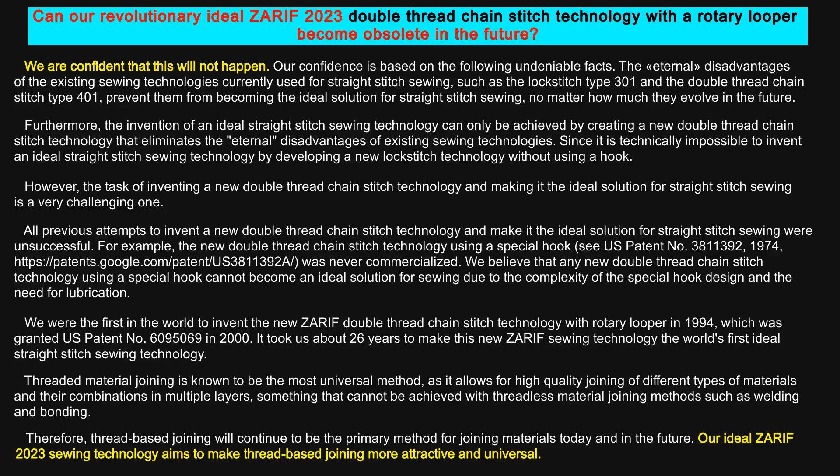Threaded material joining is known to be the most universal method, as it allows for high-quality joining of different types of materials and their combinations in multiple layers, something that cannot be achieved with threadless material joining methods such as welding and bonding. Therefore, threading is likely to remain the main method of joining different materials in the future, as it is today. Our ideal Zarif 2023 sewing technology aims to make thread-based joining more attractive and universal.